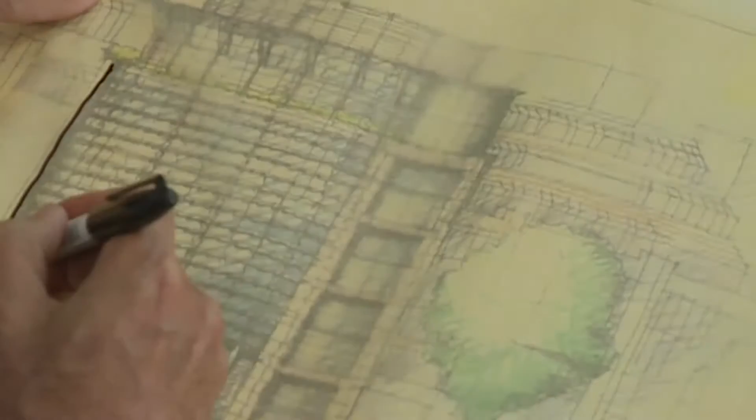I suppose drawing is really the essence of what we do. It translates our thoughts. It's also the vehicle for communicating our ideas with the world. Drawings really have gone back to the start of time as a fundamental way of communicating.

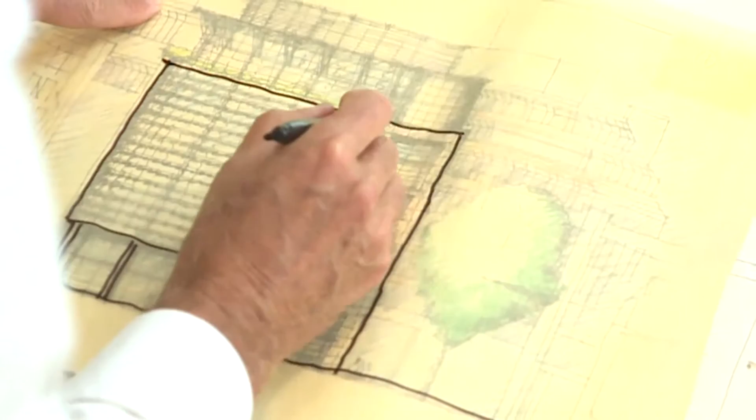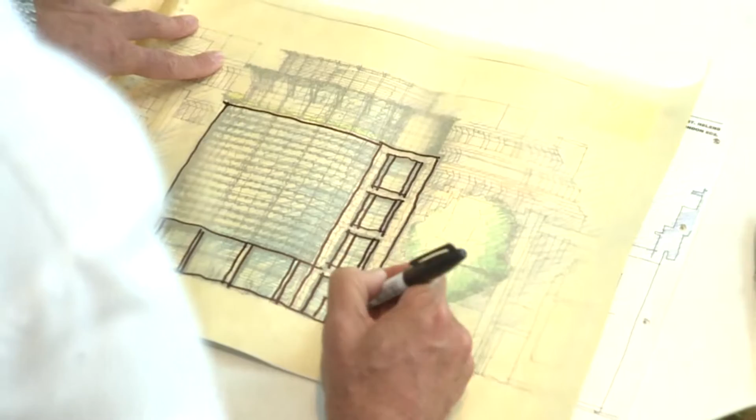I like the use of the yellow tracing paper roll. It's got a freedom to it, and the blank page allows you to really just imagineer with no constraints, and it allows you to explore options ad infinitum. The use of the pen and coloured pencils and felt pens is really a freedom that's unique to the architectural profession.

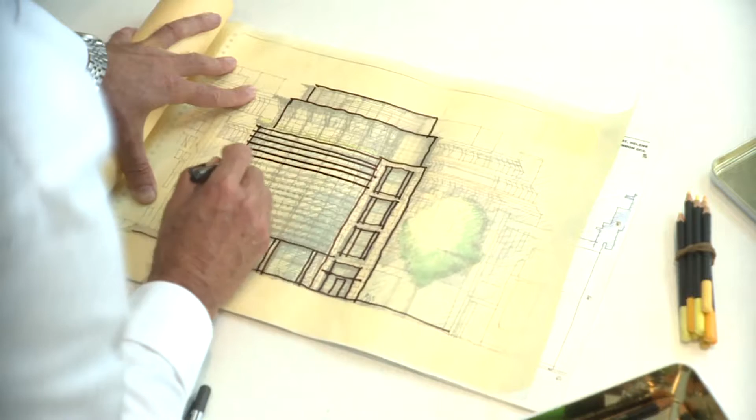And gradually the drawings become reality. You leave the realm of optioneering and get into more specific tactical thinking about the issues of how you plan a building, how you lay out a building, how you relate a building to other buildings. So drawing is really the vehicle for that.

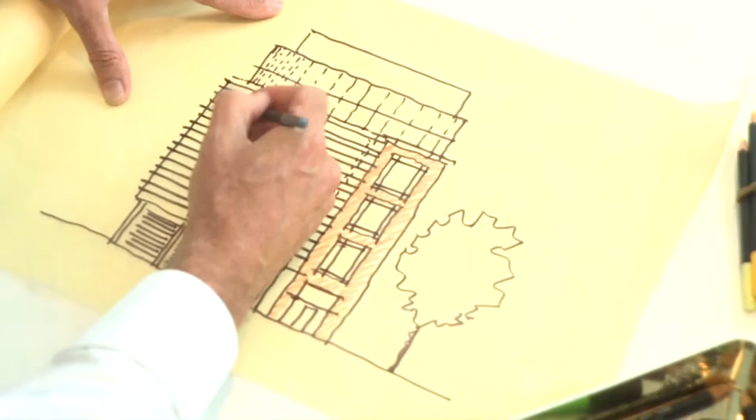You can start to imagine the textures of the building by really colour crayoning in. It's as simple as that. The shadowed diagrams and the sciagraphy all add to the depth and the three-dimensionality of the piece.

And gradually you become more convinced or otherwise by the options. The yellow paper roll's expendable, so until you find something that you're comfortable with as a solution to the various constraints, the pen and pencil just needs to keep flowing.

I think we're coming out of the recession now, and practices are beginning to grow again. The market is recovering and practices are willing to experiment, they're willing to change, they're starting to expand, and they're looking at where they're going to go next.

One of the biggest challenges has been to stop the majority of architects overdoing things and showing off. Architects will think that their buildings are important. They will think that they're visually important, and some are, but the majority of buildings are there to contain functions and to sit within a setting.

The JRA concept of contextual modernism is, I think, quite a useful one, because on the one hand it says the architecture we do is what one would describe as contemporary as opposed to classical or some other historic style. But on the other hand, it's not saying our building will have primacy over anything that surrounds it.

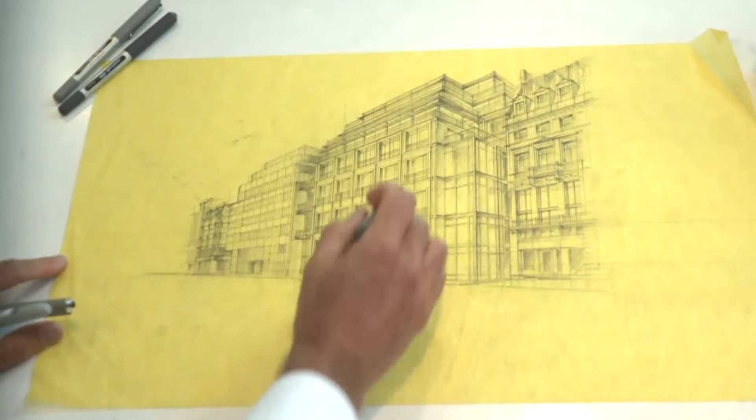But on the other hand, there was the potential for a huge amount of additional commercial space once the newspaper had moved out. Our solution was really to understand and look at the very different townscape of each of the streets and to model the building to sit within that variegated townscape. We used stone on the Fleet Street frontage, whereas we used metal and glass on Shoe Lane and on St Bride Street.

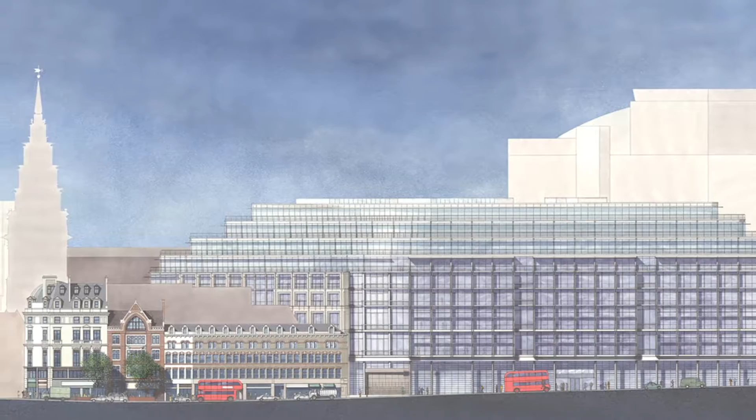JRA's work is a good example of a number of recent trends that have led to a changing face of what we think of as commercial architecture and office architecture in particular. We're sitting in the atrium of Park House in Finsbury Circus, which is a very large project that we completed for Prudential Assurance about 5 years ago.

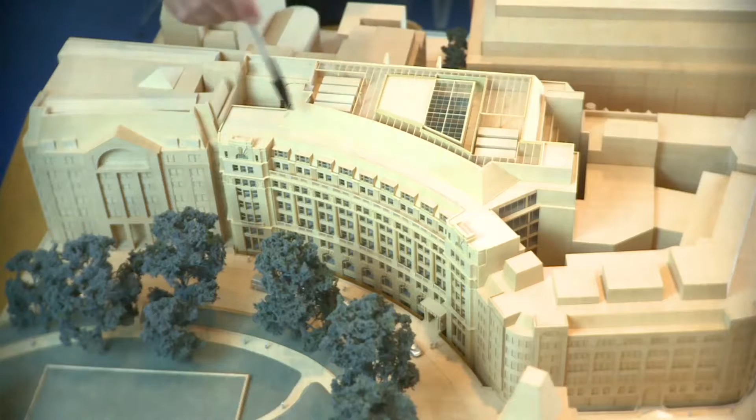Very interesting project comprising 2 listed buildings which overlook Finsbury Circus. These 2 buildings, 16 and 18 Finsbury Circus, were designed between 1916 and 1923. The opportunity presented itself to merge the 2 buildings, and the way we did this was that we combined the 2 buildings together. We extended the building onto Eldon Street.

We got permission from the City of London and English Heritage to build about another 60,000 square feet to complete the triangular master plan, and we kept the best parts of the interior, which comprised the historic entrance hall, parts of the staircase within that entrance hall, and of course all of the structure within the Grade 2 buildings.

We've been able to create 20,000 square foot office floor plates, which by city standards have tremendous natural light from Finsbury Circus. You've got the beautiful aspect of Finsbury Circus, the rear view which overlooks Broadgate, and the central atrium brings light right down into level 1 of the building.

I was very keen to contrast the modern additions with the historic fabric. So we're sitting in what I feel is an uncompromisingly modern atrium, but it does actually really reposition and rebrand the building.

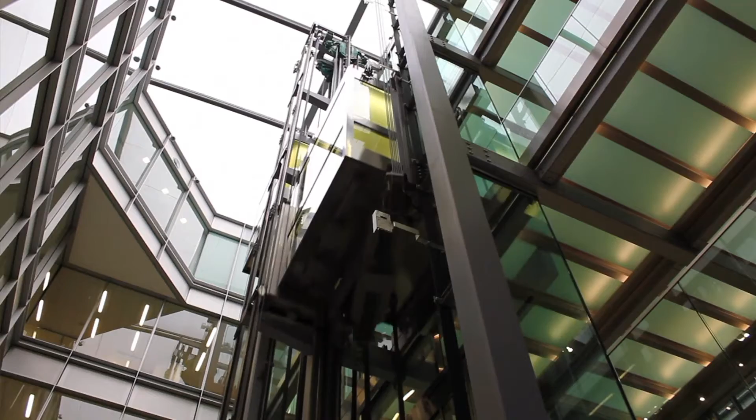There was a huge structural intervention. It involved what I call open heart surgery. We really worked very hard to make this one of the first generations of green retrofit buildings.

We've got very good perimeter light around the outside of the building, and excellent light within the middle of the building. The atriums are used to exhaust the hot air out of the offices. We've created a whole new entrance facade, which is double height, draws people into the building.

One of the greatest strengths of the work that our firm does is that we add significant value to the assets that our clients ask us to work on. 10 Queen Street Place is a prime example of that. The client's been able to sell the investment for quite a significant improvement in the capital value.

There was the real opportunity to make use of the roof as an amenity for the office occupiers, and we did this in two ways. First, we were able to persuade the city that we could slightly encroach through the grid on the north part of the site and build about another 25,000 square feet of office space.

And the south side of the roof provides about another 25,000 feet of roof garden. We've really maximised the tremendous views onto the south side of the river, where you've now got the Shard, you've got Tate Modern, and as you look west you look up to the Savoy, the Adelphi, and even the Houses of Parliament.

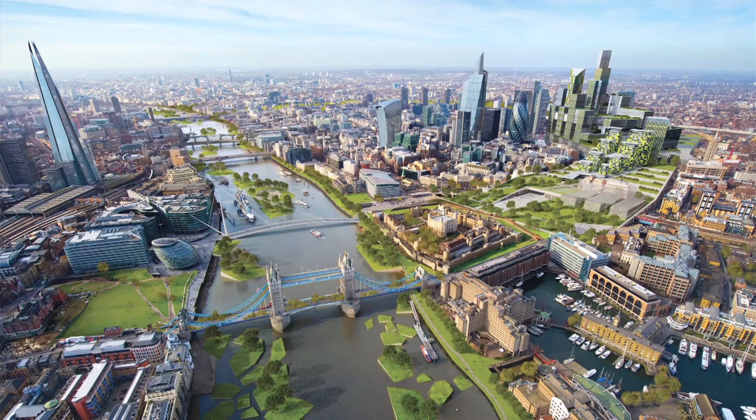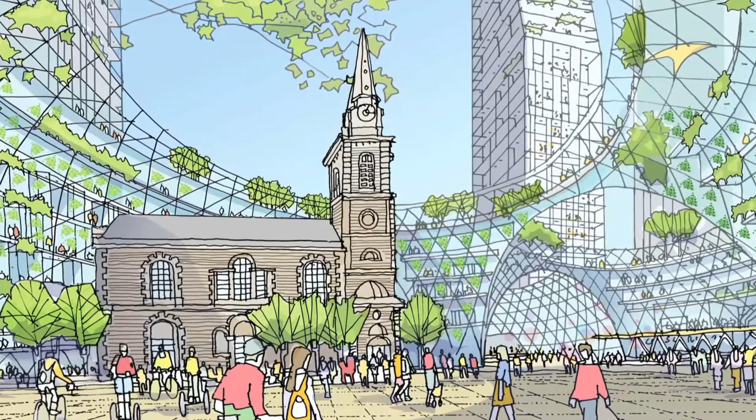The idea of what the vision would be like in a further 50 years, areas like Aldgate, where we felt there's the opportunity to build a new financial centre that could link the south bank of the river with the Shard and More London with Broadgate in the north.

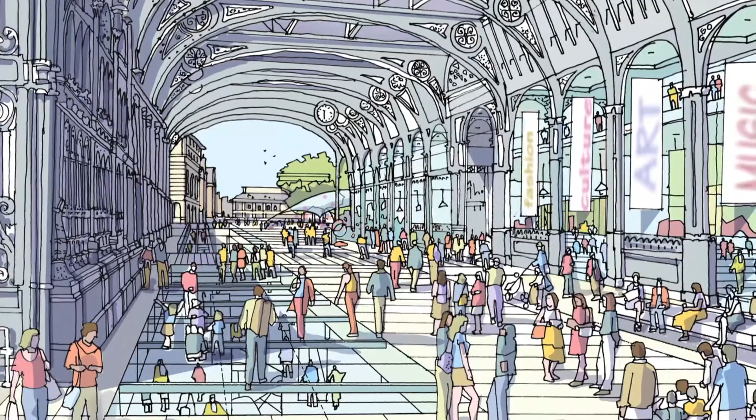Smithfield, where we felt there could be a new cultural quarter linking St Bartholomew's Hospital with Farringdon, with the new Crossrail station, and indeed with Smithfield Market.

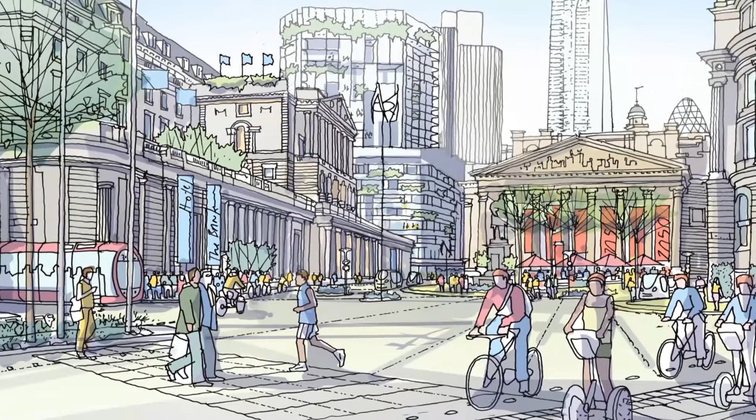And we also took a really close look at what the city core might be like in 2050, and I think we felt that above all the city would become an even greener place to live and work.

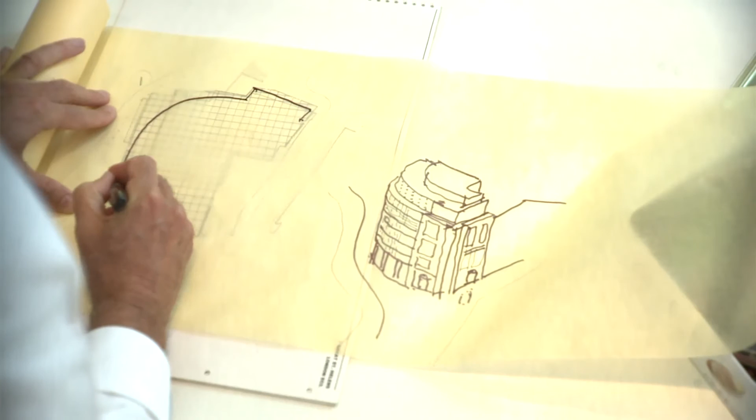You cannot predict what sort of architect will be doing what sort of building, and you cannot predict 100% what the outcome will be. In other words, it's become more about design and less about formulaic concepts. So the new world of commercial architecture is actually the world of architecture.